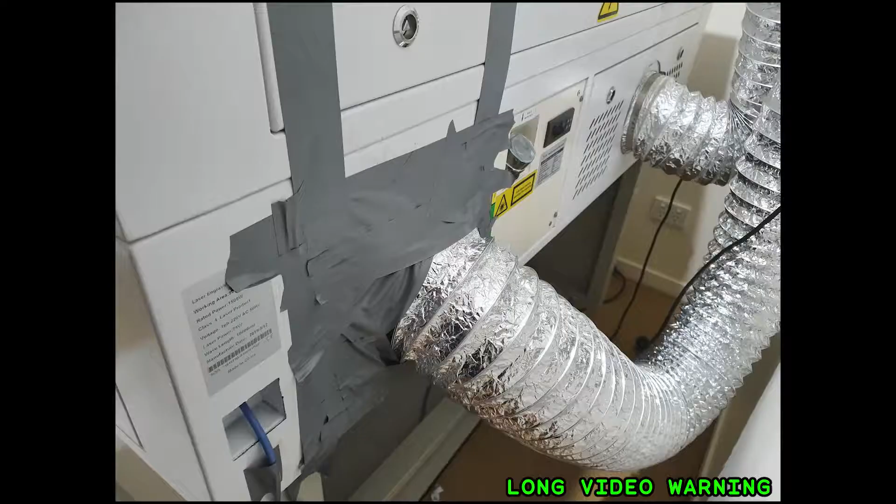I need to create an air extraction box for my laser. The manufacturer behind my laser is absolutely amazing, but there's one small detail that's really been annoying me. I'll let you judge from this photo. This is my current setup and it really is not ideal.

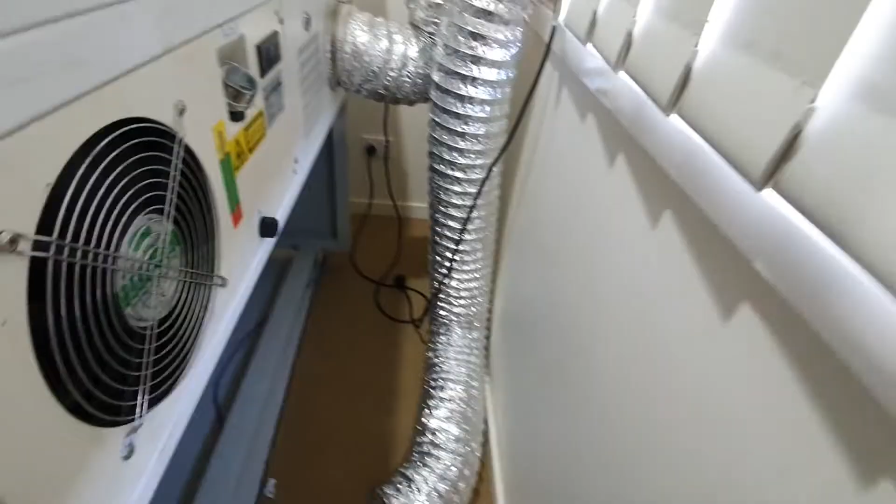The tape leaves a huge messy residue behind, and because there's warm air coming out of this vent, it tends to fall off a lot. Time for a permanent solution made with the laser itself and the 3D printer.

My laser has a built-in chiller that keeps the laser tube nice and cool as it runs. The way the chiller works is a lot like the way a radiator works in a car. In a nutshell, it's a heat exchanger. It generates quite a bit of hot air.

The hot air itself isn't the problem. The laser already has an air extraction system built in. The problem is that the chiller runs every 2 to 3 minutes while the laser's firing. Because the chiller fan's so powerful, it draws vacuum from the laser enclosure. That means that some fumes are actually pulled into my office workspace, which isn't great.

So now to design the solution. Let's start with the things that we know. First I'll design a plate to go over the fan outlet at the back of the laser. The biggest I can go is 230mm tall by 250mm wide. I also know that the fan diameter is 200mm. The fan shroud sticks out a bit, so I'll need to add some clearance for the mounting screw holes.

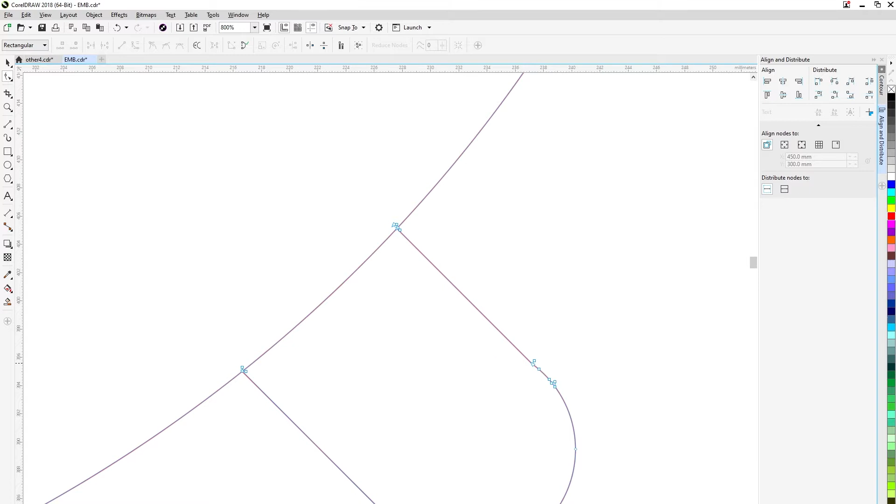Thanks to Corel, vector editing is super simple. It takes me less than 10 minutes to come up with a design which fits snugly over the radiator fan. Up to this point we've been thinking in 2D, now it's time to jump to 3D thinking. So now it's time to design the airbox.

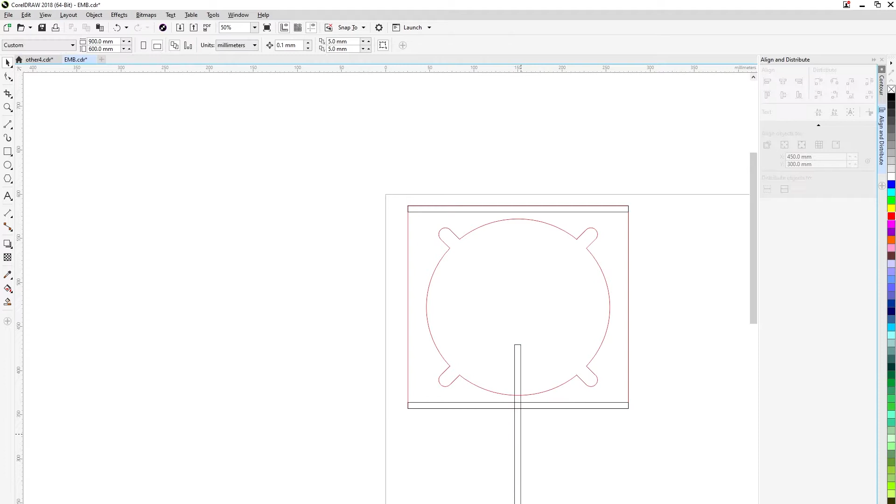We know that the plywood's 7mm thick. With that in mind, we can design the finger slots which will form the box. Even though it's a bit of extra work, I'm going with a 10mm slot size. Come on, you gotta love the metric system. Now to make a 10mm grid pattern. This will make it super simple to cut out those fingers.

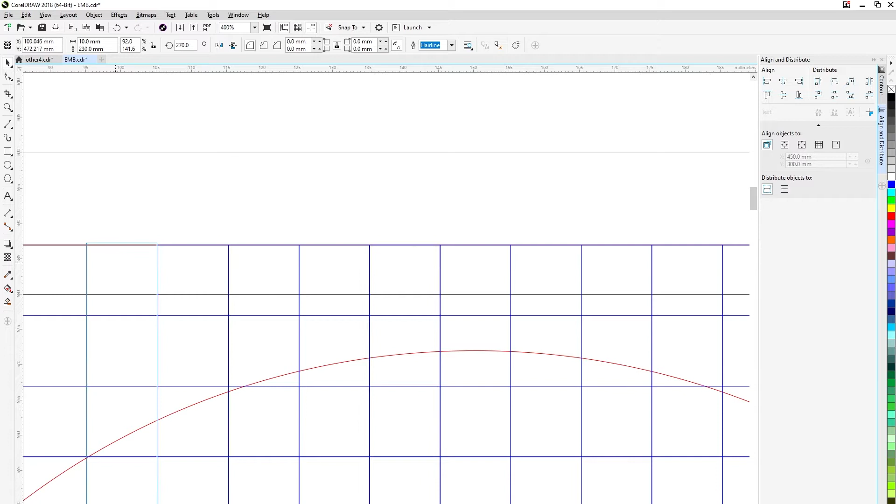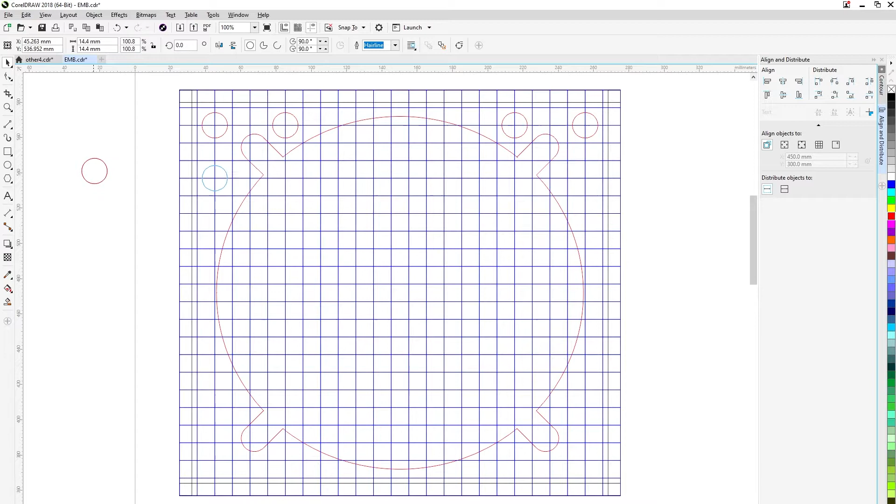So how's this all going to attach to my laser? Luckily for me, the case of my laser is made out of steel. I found some 14mm neodymium magnets on eBay. Now I just have to make some suitable mounting holes for the magnets. Now to make some decisions on where 8 of those neodymium magnets are going to go. I'm really excited that this won't have to be permanently attached to the laser.

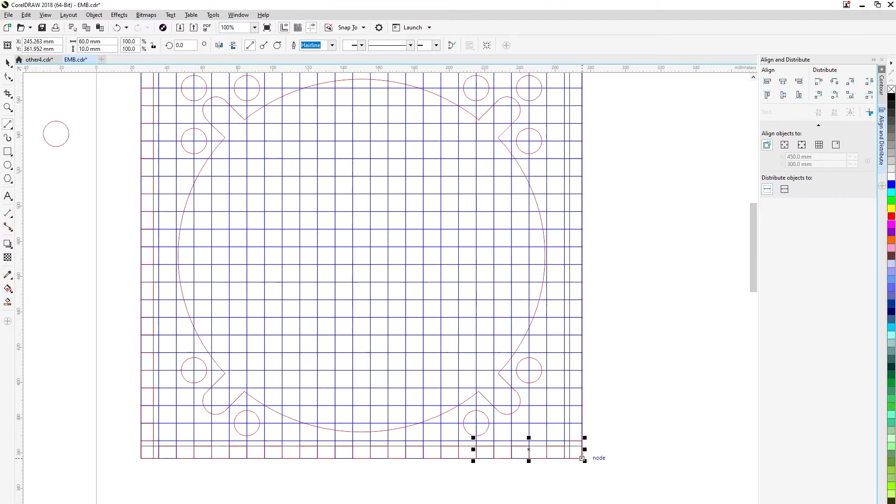Now we have to form the slot outline that's going to make this box. It's not too much work, so I'm going to make this manually, so you'll see how that's done. If you want to do the same but not as much work, you can always use MakerCase. By sheer luck and no forethought, the size of this box turned out perfectly. The offset of one side being 230mm and the other being 250 makes this design fit really well.

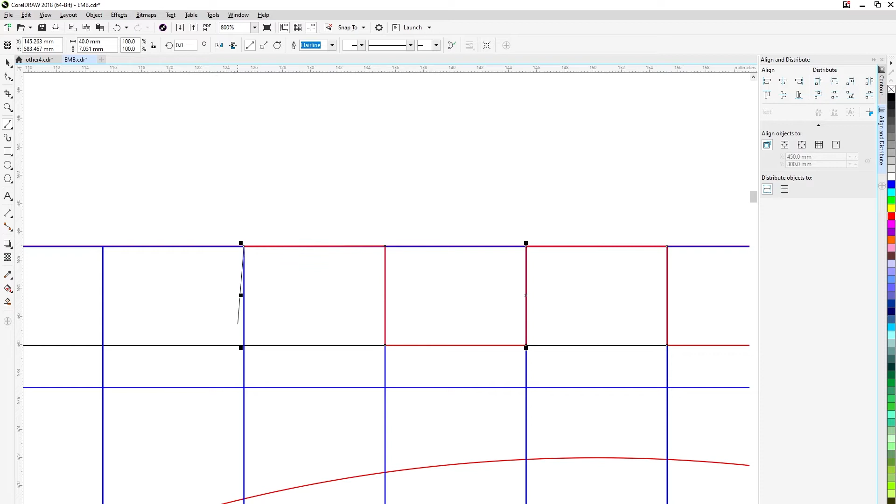And that's the mounting face completed. Technically I didn't have to do this next part, but I took out some extra nodes just to make sure they weren't in the design. This part is ready to cut, but we still need some more.

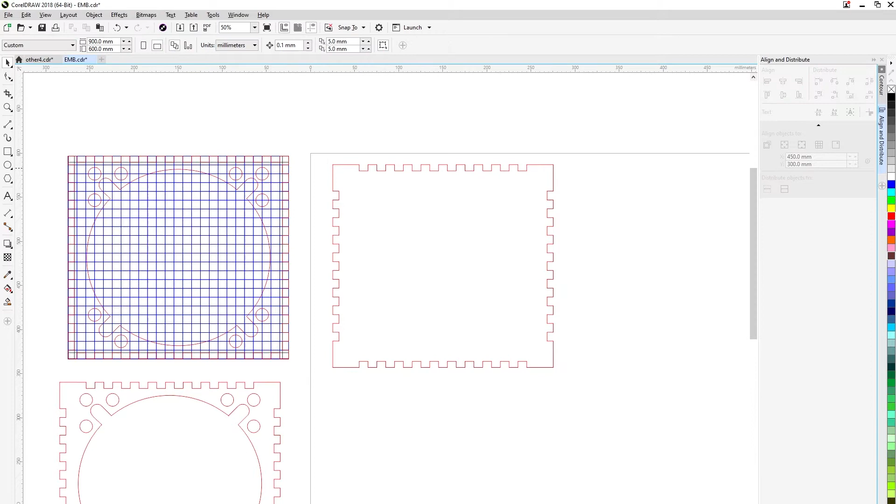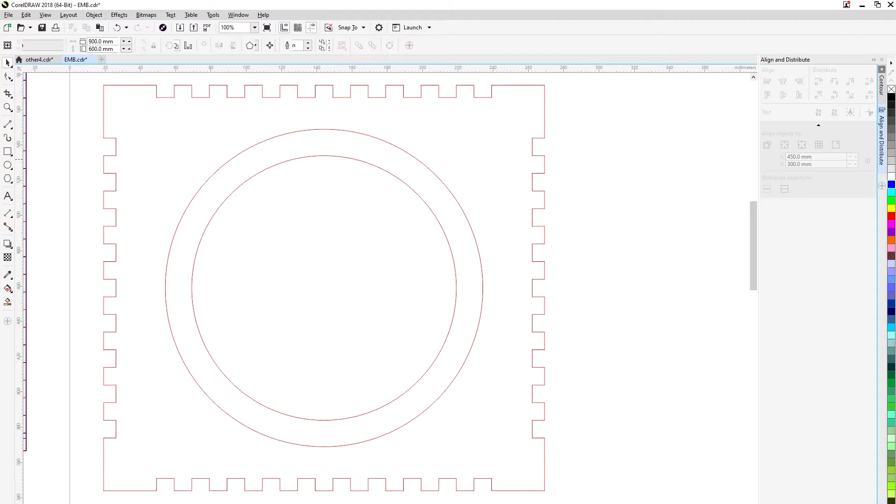I duplicated the design that I've already created because the front and back faces of the box are going to be identical. Not completely identical, but you get the idea. The outer side of the airbox is going to have a 3D printed flange. The flange size is predetermined by the air extraction hose that we're using. In this case 150mm or 6 inches.

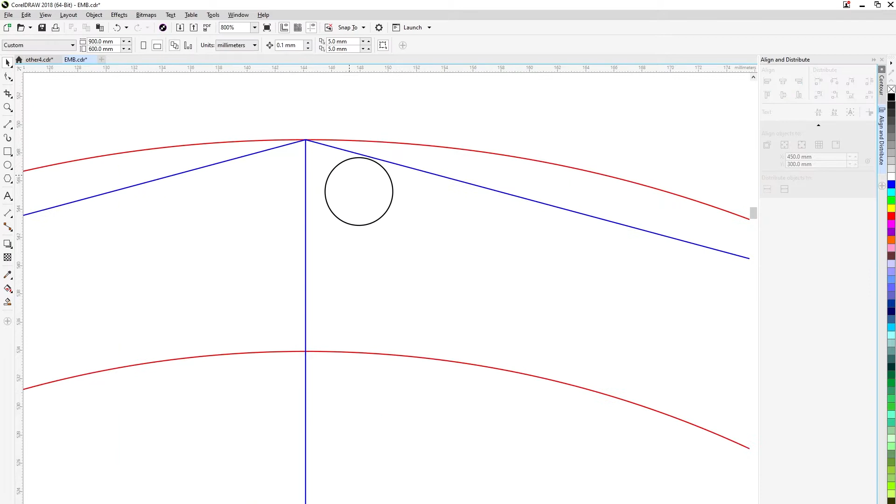Now we just need to establish the PCD or pitch circle diameter of the bolt pattern. I'll be using 12 M5 fasteners for this design. So that the bolts clear the outside of the flange, we need to make that PCD a bit bigger at 165mm. Corel makes this really easy using the polygon tool. I just pick 12 sides and lay that out inside a circle, and now I know exactly where my mounting holes need to be. I'll slightly oversize the mounting holes so that they have clearance for the bolts. Rinse and repeat times 12.

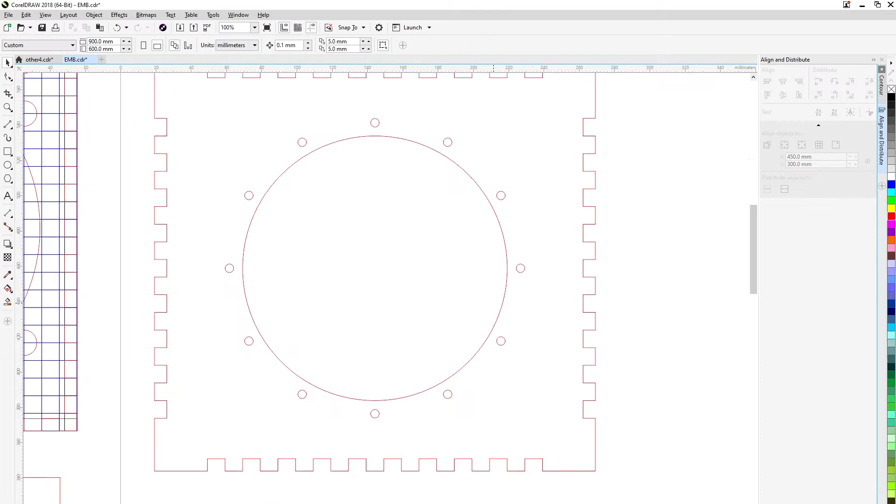Alright, we're getting closer to the goal. We now have the inner and outer faces of the airbox. The mounting flanges look awesome. Next I'll need to form up the four sides of the box to enclose it. Here's a trick that I learned in graphic design in high school. Because we've already got the design, we can project outwards from that to create additional designs with similar features.

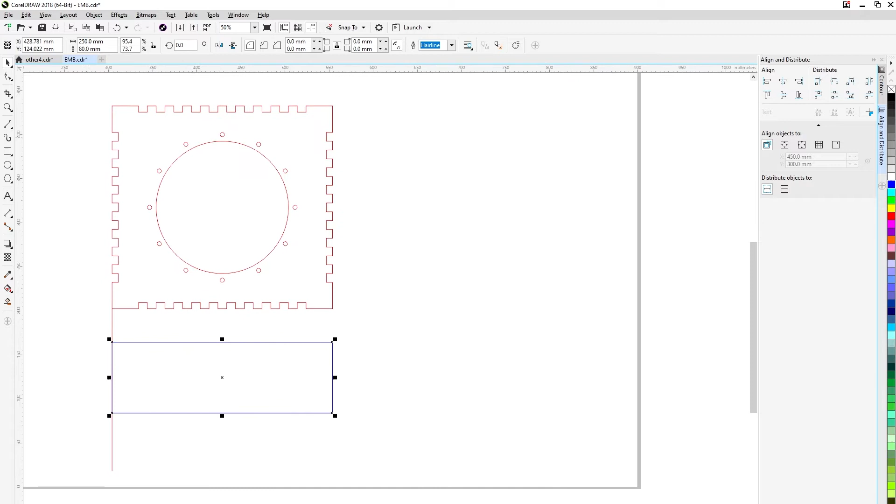Remember that with this design it isn't a square, it's a rectangle, so we have one side longer than the other. It's a bit of extra work, but that's okay, I don't mind. I've got to step back for a second and remember that we're working in 3 dimensions now, and that these sides are going to slot into each other. So with that in mind, one side's going to have a different mounting face than the other anyway.

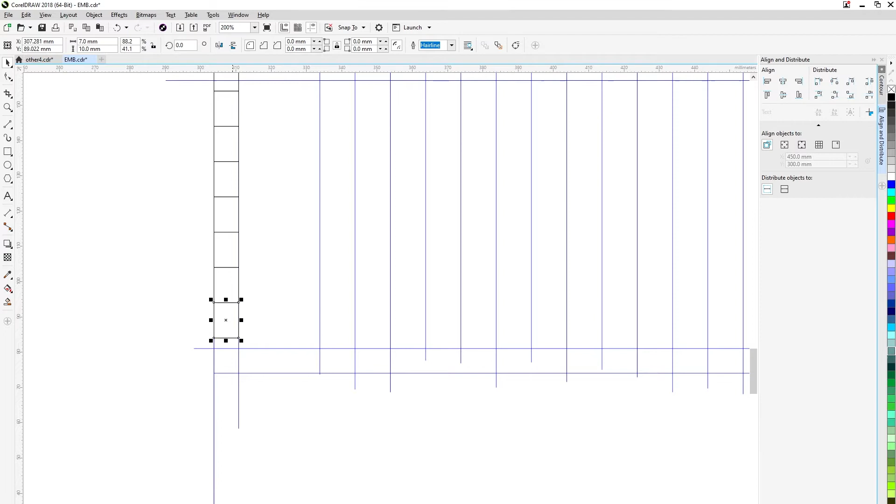Here's the bit where I realised I walked into a trap. Yep, nobody to blame but myself on this one. Originally my design had 70mm for the depth of the sides of the box. I forgot to account for the thickness of the plywood that I was forming it out of, so now I'm having to add an extra 7mm to each face of the box.

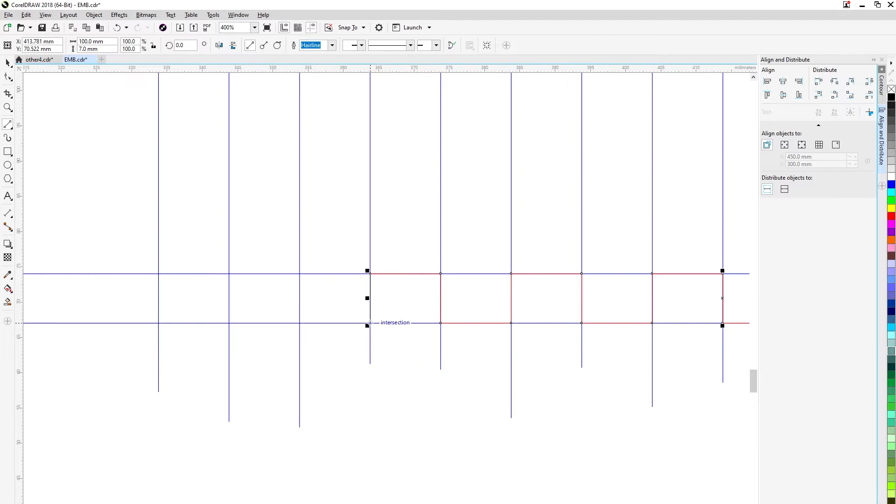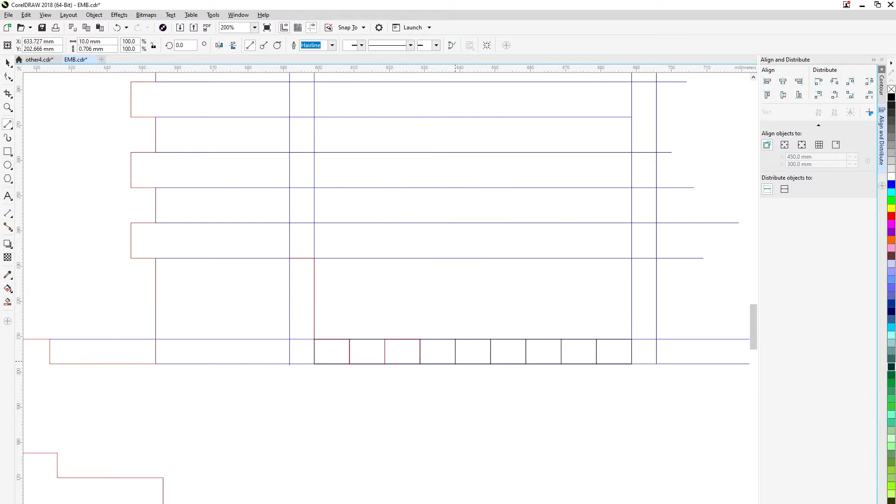And that's one side finished. Looking good. Rinse and repeat, we've got to do the other side now. The good news now though is that this is the design phase of the box almost finished.

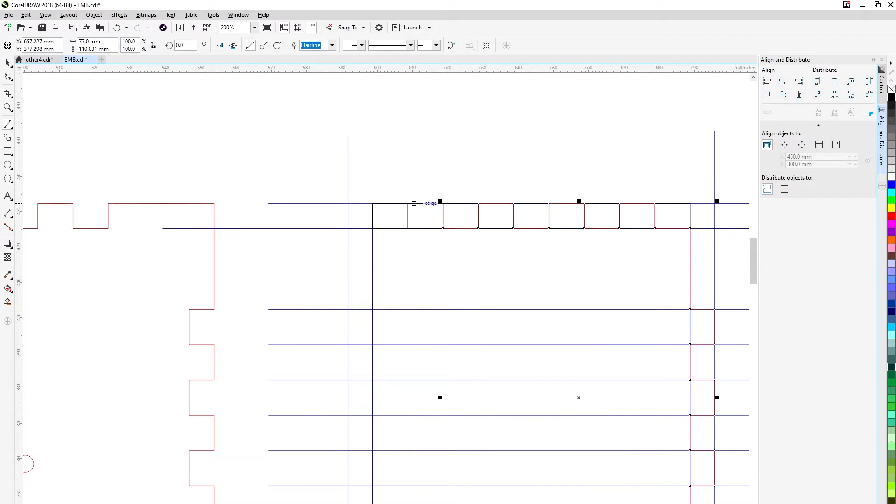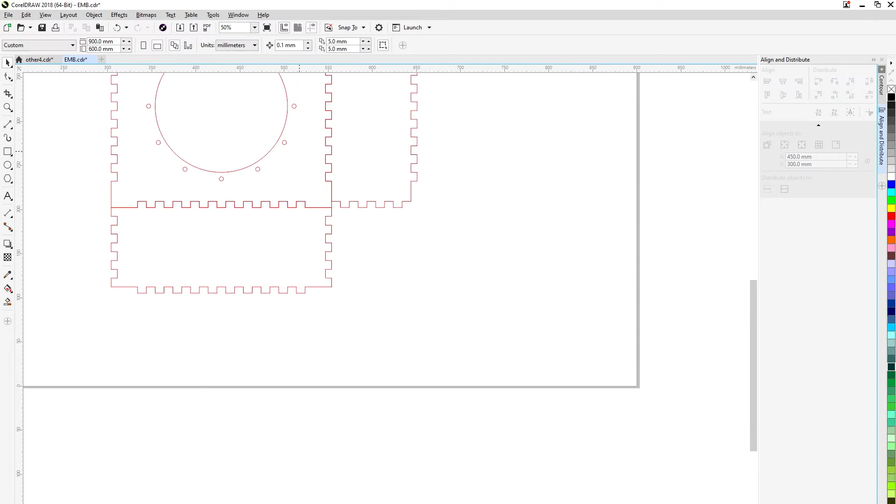Now the laser box design is done. I can virtually overlay the parts to make sure that I've got all of the slots right. We can move over to the laser, my favourite bit. Watching a laser cut never gets old. It's kind of what got me into this in the first place. It's kind of mesmerising to watch.

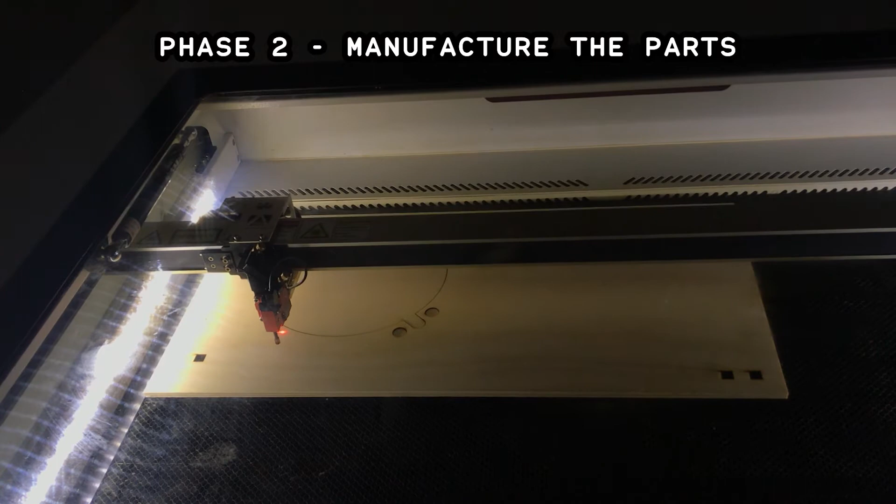Not long into this cutting, I remembered just how bad the room gets when I don't have that extractor on. It really does stink, and it's not ideal to be breathing this all the time. I didn't want to put it back on because I'd spent a lot of time cleaning the tape residue off the back of the machine. Luckily this cutting didn't take too long, so I just put up with it temporarily.

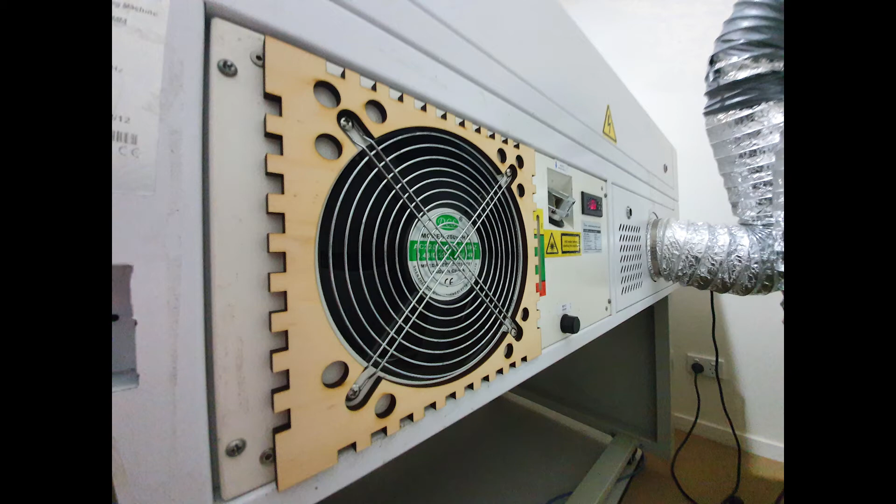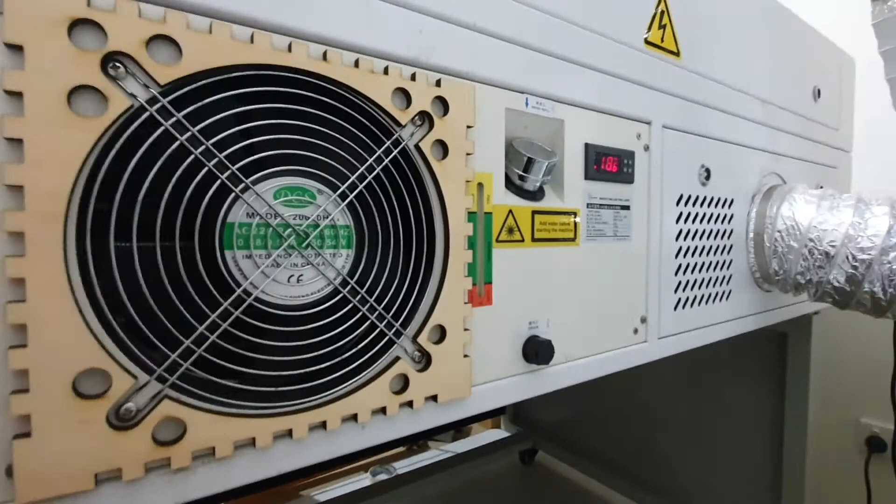The chiller's constantly cycling water around the laser tube to keep it cool. My machine runs a glass laser tube. It's really important to make sure that they stay cool, otherwise the glass tube can crack, and they're not cheap to replace. Even though this fan runs only when required, I still have a 6-inch or 150mm diameter fan in the window that runs at all times. That keeps all the odour in my filter, which sits outside of the window. I'll show that in another video.

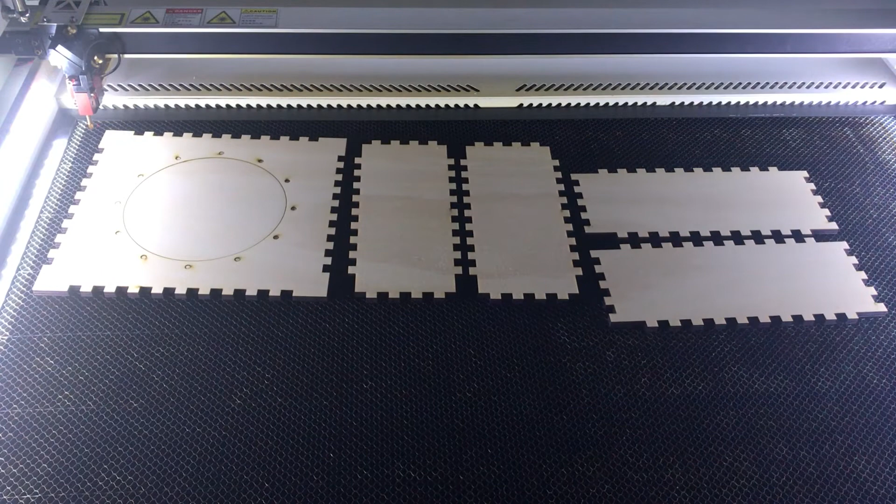Now we've cut all the plywood on the laser, 12 magnets, 12 holes, what could possibly go wrong? Oh, what? Broke one. Gotta be kidding me. Well, that'll teach me. I knew that neodymium magnets are strong and that they can shatter, but I still went and did it. I'll replace this one later.

Can't believe that. My next problem to solve is that the magnets are thinner than the plywood. Epoxy also makes a huge mess, and I didn't want that leaking out on the bench as I glued them. My dollar store fix is some hot melt glue. The hot melt glue did the trick. Did a perfect job. A small bead applied to the outside of the magnets held them perfectly in place in their slots. This side's the mounting face, so I'm trying to get the magnets as flush as I possibly can.

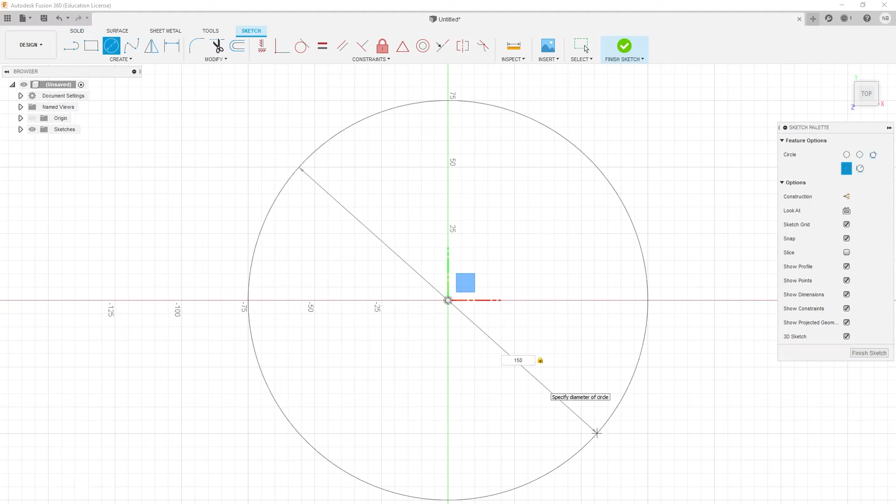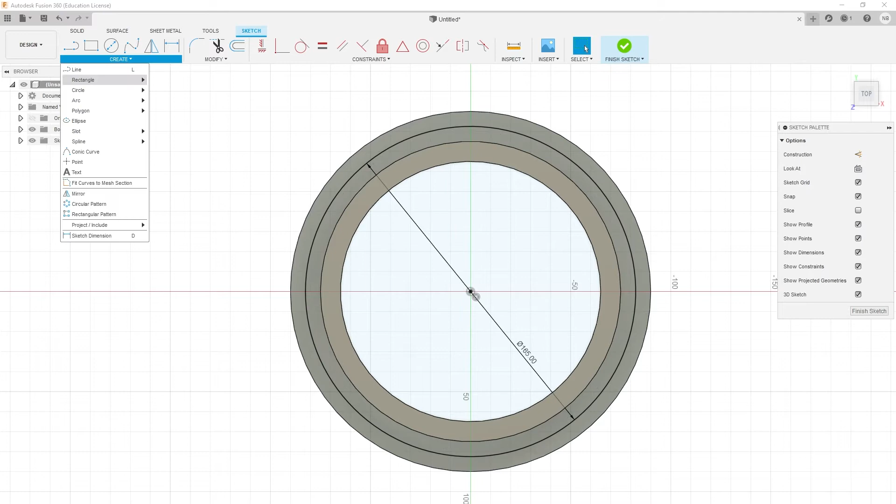Oh yeah, remember that flange I've been banging on about that's going to be 3D printed? I should probably get to designing that. Now we need to copy the PCD from the flange mount on the plywood. So one more time, 12-sided polygon, M5 mounts, you know the deal. Should by now.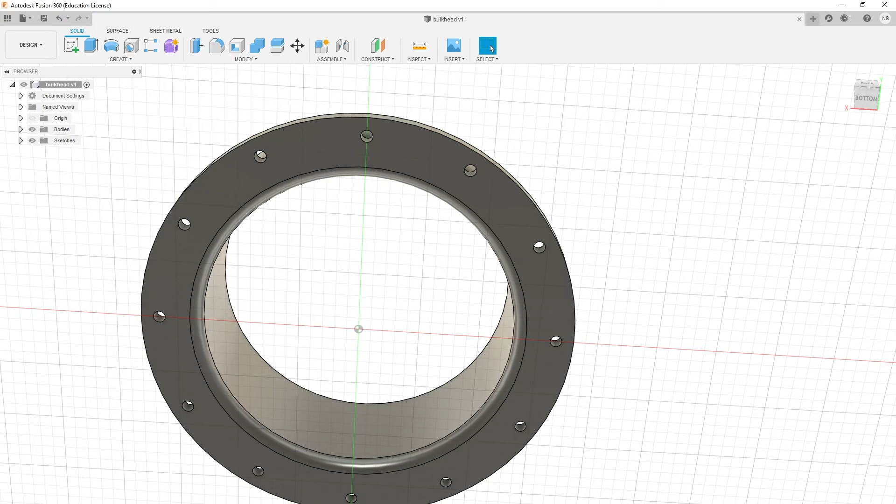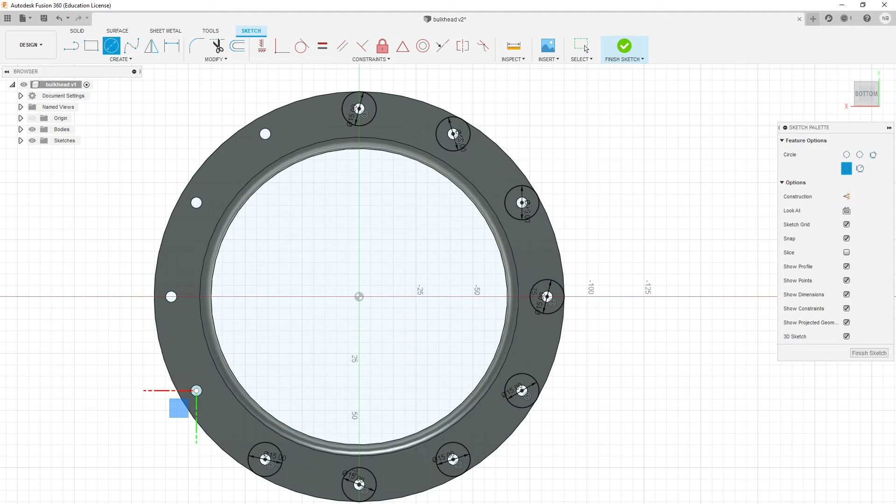So now's the time to start talking about my nuts. Wait, no. Backtrack a bit. I mean captive nuts. You know what captive nuts are, right? Captive nuts are designed into the part so that we don't have to worry about holding a spanner on the other side when we do these hex bolts up. I'm not making a thread, we're actually going to insert the nuts into the 3D printed plastic part.

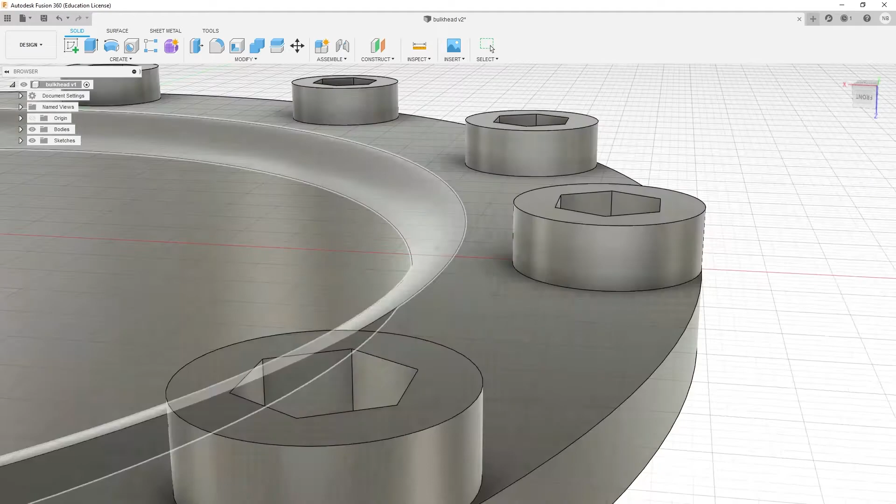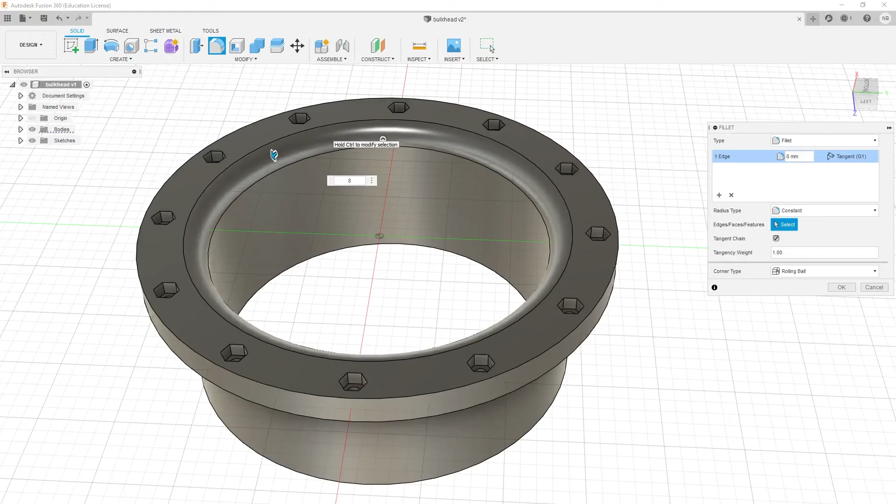I can hear what you're thinking. You're saying, man, that's a lot of work just to make this thing. 3D printing is so rewarding, and it feels so good to have that item in your hand once you've finished working on it. Let's get 3D printing now. It's time to print this flange.

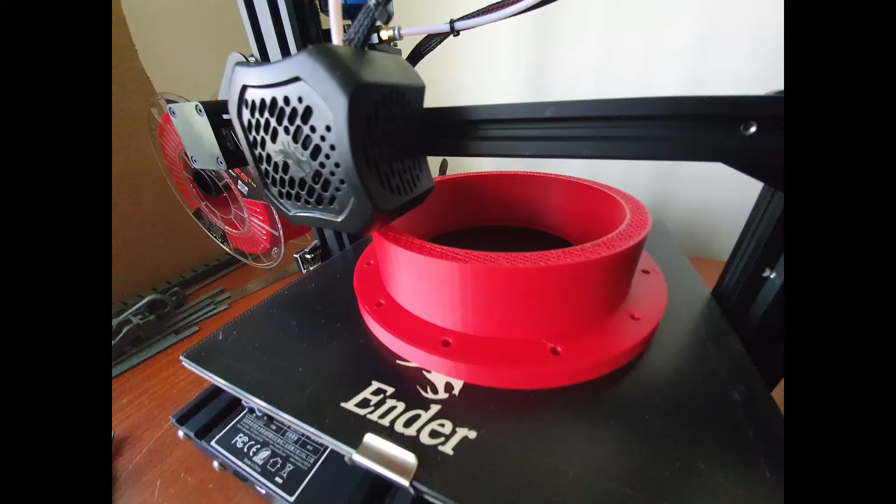20 hours of printing, 110 meters of filament, that's a third of a roll. Stuff gets crazy sometimes. Captive nut slots were the only part that supports were printed in, so these need to be removed before we can go any further.

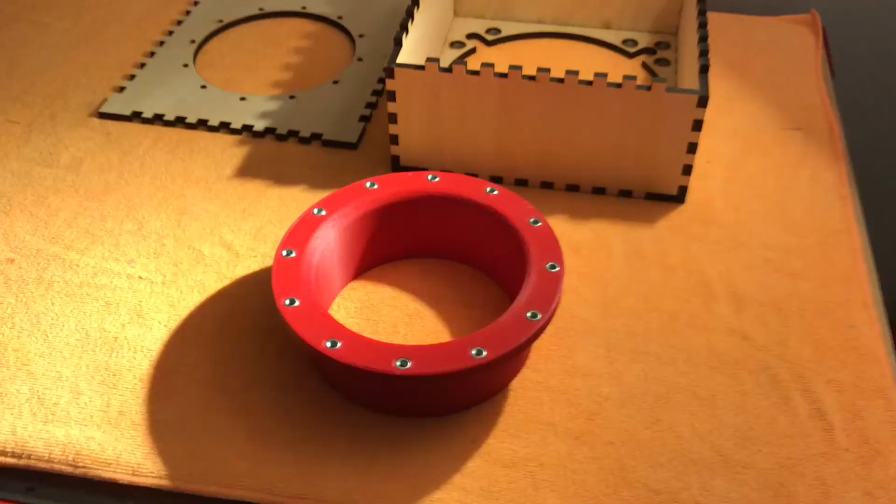The manufacturing process is complete. Now it's time to start assembly. Now with all of the M5 nuts inserted into the flange assembly, it can be bolted onto the box, and we're almost there.

If you can see light through the bolt holes, that means you're probably on the right track. The sizings all come out perfectly between the 3D printer and the laser. If your machinery is calibrated right, it'll never be a surprise. There might be some small tolerances here and there that you need to play with to get things just right. We got things just right, so now it's time to bolt that flange into the box.

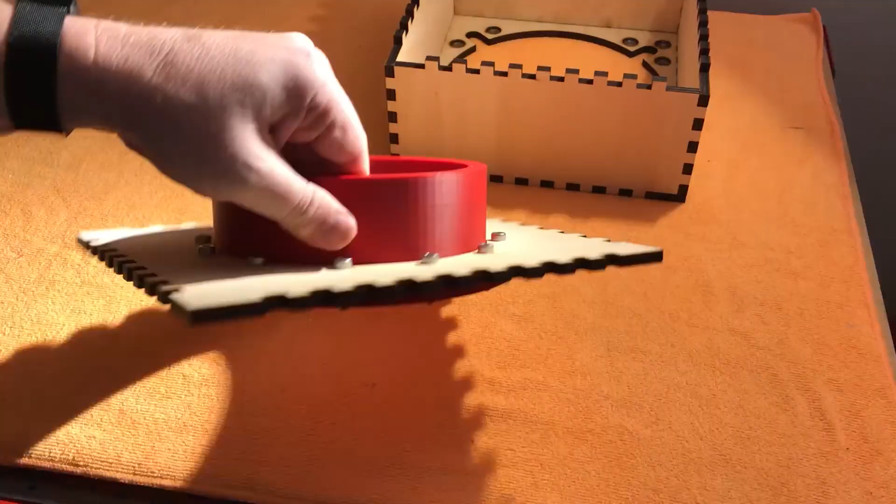It's the first time I've done this kind of construction before, and the fitment here is so perfect that this doesn't even need to be sealed. And that's really good because if I ever decide I want to change this flange in the future, I won't have to remake the entire box.

So let's clip these two halves together and see how it's going to look. And in case you're wondering how strong the neodymium magnets are, this is trying to stick to my steel bench through 1/2 inch or 12.5mm MDF and a microfiber cloth. Did someone say satisfying moment? Oh yeah. Alright, time to seal this puppy up.

I'm a massive fan of the Selleys 3-in-1. It sticks, seals and fills. Perfect for what we need. So I'm going to put it out there that my sealing job here doesn't look fantastic, but I did do the finger wipe of shame at the end and smoothed everything down, and it does look okay at the end, so don't judge me just yet.

Since the very start of this video began, this has only ever been a mental image in my brain. I didn't put pen to paper or make any sketches or designs before I even started. You've now watched as I've designed it straight from my brain to the screen to a physical object, and I think that's really cool. So we're pretty much finished, and it's time to hook this puppy up and start using it.

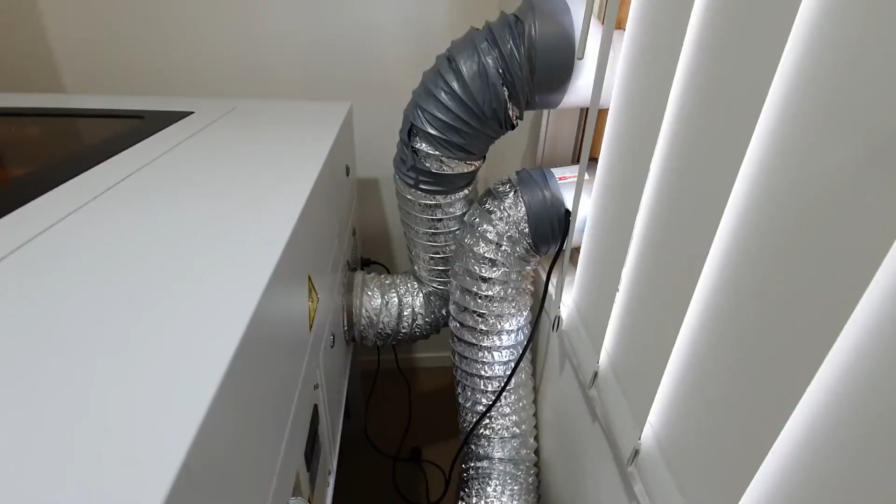In case you were wondering, 9 magnets is still enough to hold this on solid as a rock. There's no way this is coming off on its own. And just like that, everything's back to normal again. No sticky messy tape on the back of the machine, no smells in my office. Perfect.